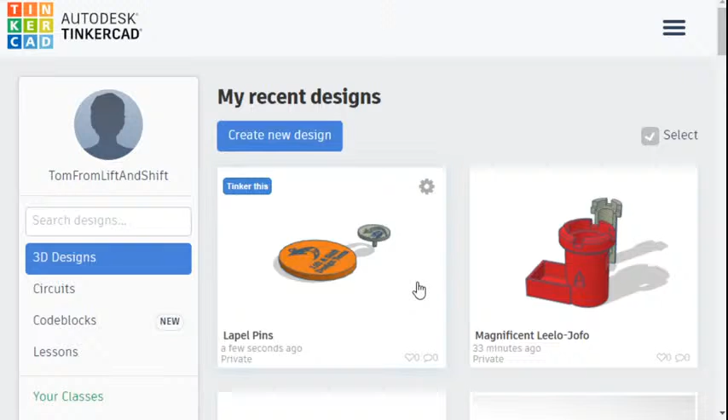We use this for a lot of design, both working with veterans in workshops and outside on our own, in our design team behind the scenes. Here we're building this robot - this was our first prototype of a brain for a robot we're designing. This is a keychain, and I'm going to right-click on that and make it go away somewhere else for the time being.

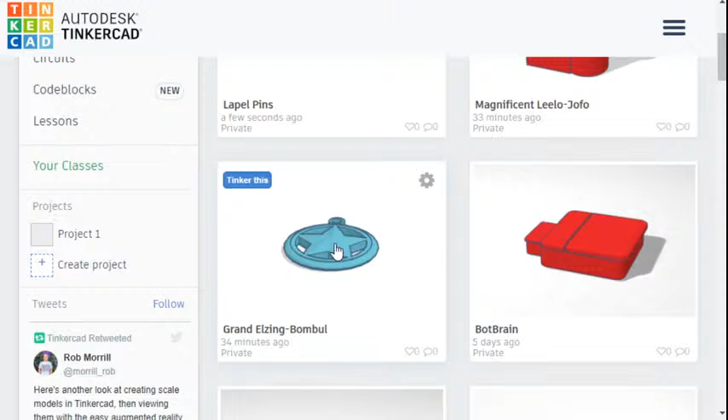This is a design by one of our design team members. It won one of our contests in 2020. It's a dice tower, and I have a feeling this may make it into some of these sessions as we turn it into a printable gift for people. It started out as that little tan object on the right, the little castle, and through one iteration developed into a much larger castle. We have some ideas on how to make it better, so that may be something we launch into on a Thursday night for one of these design sessions, and that should be fun.

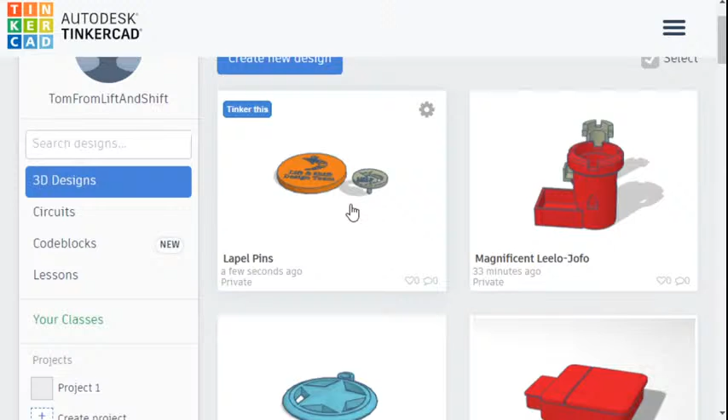Also in here we had a contest recently with some lapel pins, asking people to design their own. This was our design team who actually took to Tinkercad and came up with their ideas for their lapel pins.

Which I was absolutely amazingly thrilled with.

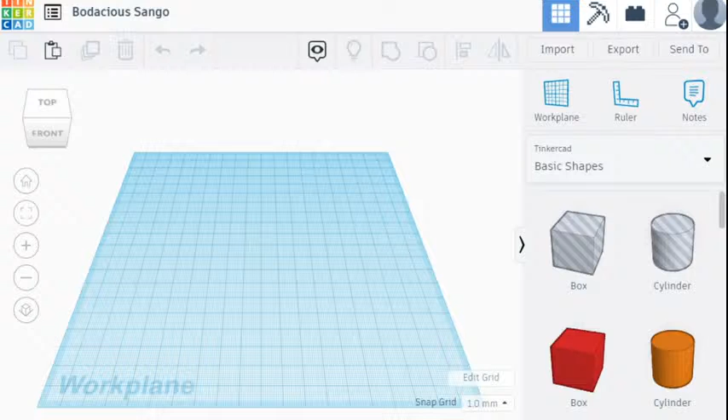Here we're going to start with a very simple design. I'm going to create a new design in Tinkercad, and here's my one tip of the night. I found recently that the toolbox slides back and forth, and I like it open, but it's too big the way it is. So I can shrink it down by going to my menu and zooming out in Tinkercad. Now my menu isn't as big and bulky, not taking up half my screen. For this session, I'm going to zoom out of my view so I can see my workspace, my toolbox, and actually do some things.

So we're going to design that keychain, the star-looking object you saw. We're basically going to design that keychain, and if anybody tonight wants to donate to the cause, we will print these keychains and ship them to you. But like I said, this is much more about giving things away while we're doing it.

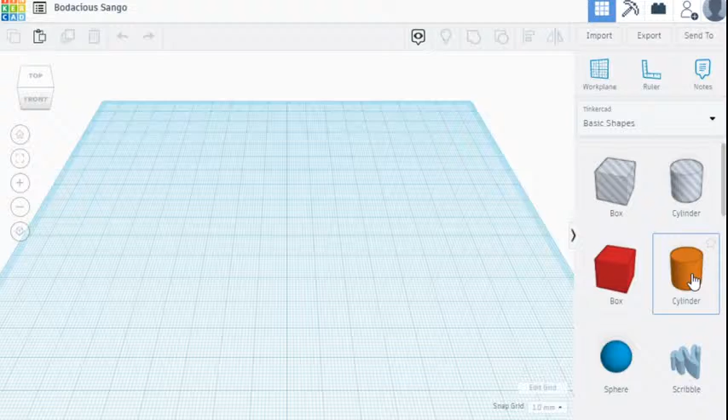I'm going to start with a cylinder and make it flat. I'll click up here and change it in the numbers by 3 millimeters. Here's the cool part: because I zoomed out on my window, I can zoom in very close. I'll center on my object so I can see it, and crank the sides up so it's all fancy and smooth. This is 20 millimeters by 20 millimeters.

I'm not a big fan of that, it feels kind of small. So I'm going to change this to 30, and change this to 30 as well. I'm kind of doing this freehand off the top of my head, and I promise we're going to end up with the same model. I'm going to slide it over again, actually I'll do that number right there.

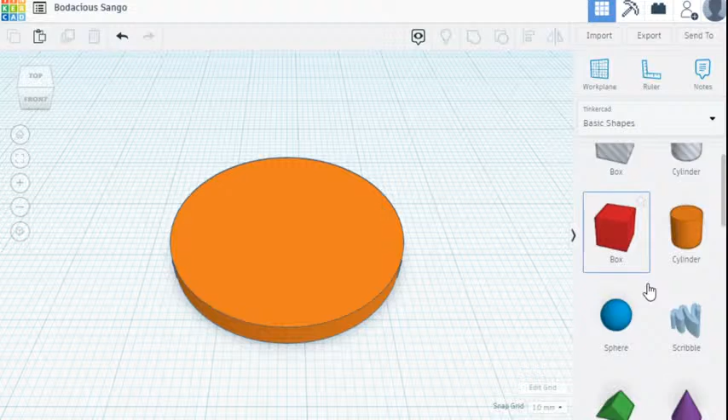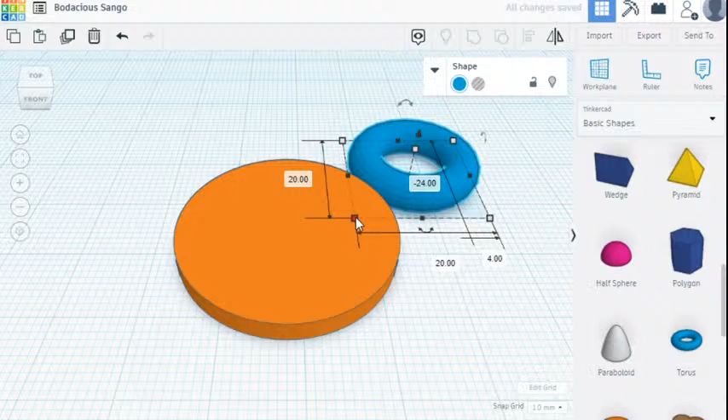Now, I don't like the sharp edges because it just doesn't feel right to me, it looks like a coin instead of something that hangs on your keychain. So let's talk about some design. We can get rid of the sharp edges by putting this donut around it. Yep, okay, it's not a donut, it's called a torus, that's the technical shape. The name for it is a torus, but I call it a donut because, like Homer Simpson, that's much of what I think about.

I'm going to get this out a little bigger, like that. And I'm going to drop this down to, let's say 2.75. Let's try 3.

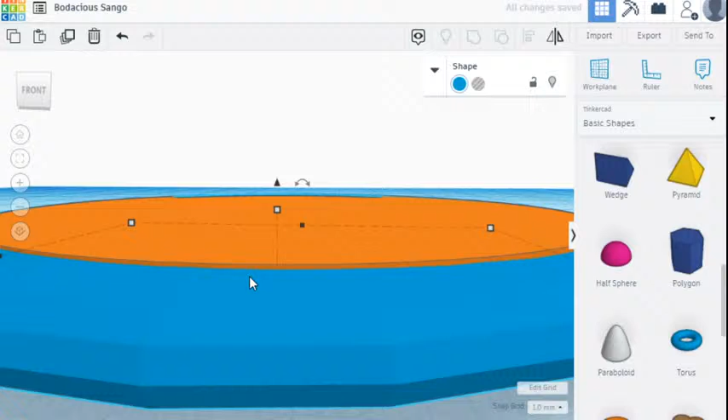I'm going to drop it in there. What I'm looking for is this lip right there—see that little edge? It's almost like a piece of molding that fits around this. So it gives us this round disc, this soft disc, but it gives us a flat surface.

So now we've got this pocket watch shape, and I'm going to call it a pocket watch as we get further along. I'm going to unfold my shape characteristics. I want to crank up the sides so it's a little smoother, and you can see that right there—it got a little smoother in the steps.

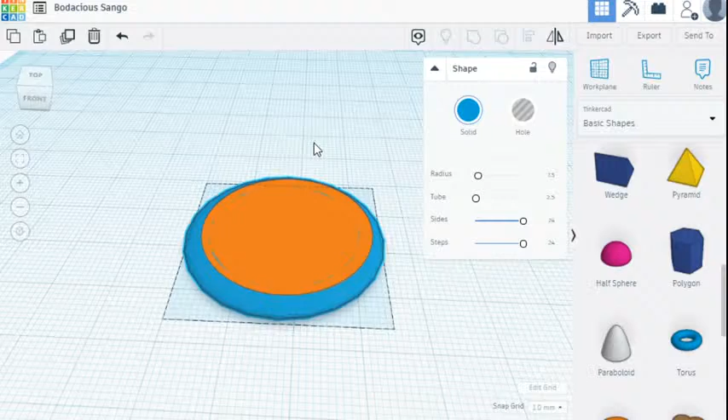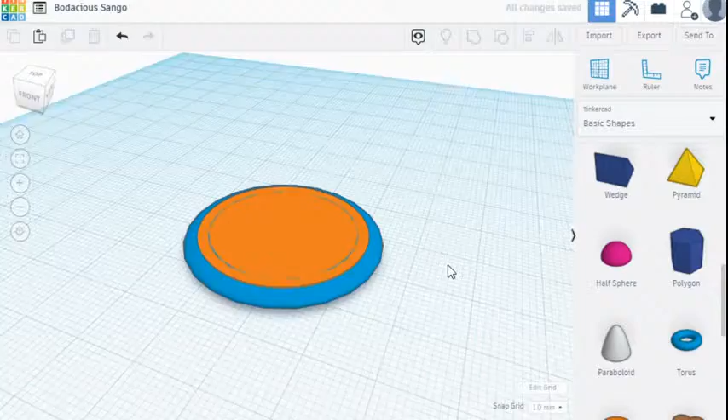I'm going to back up, because today I'm not all about design and telling you how to use these features up here, like aligning things and grouping things. I'm going to go through this a little bit faster. I'm going to grab all my objects, and instead of grouping them, I want to align them like that. So this is kind of like the speed course for more experienced people in Tinkercad.

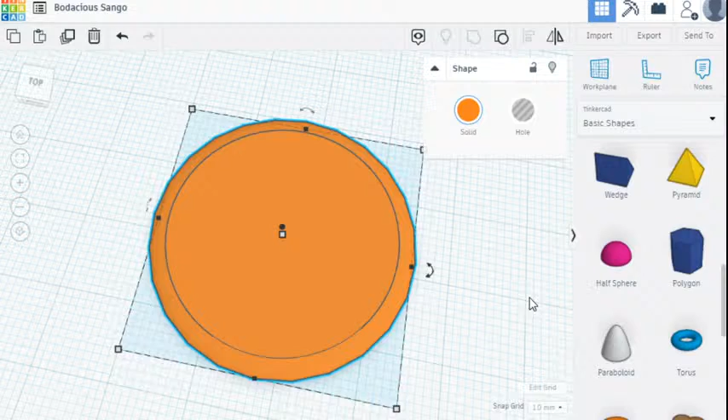So now I've got this disc, or this soft donut with a flat surface that I can work on, and my pocket watch is pretty complete. I could put it together and say I'm done, but I'm not happy with that yet. That still doesn't look like a very cool keychain. So I'm going to add this tube.

Now I'm going to focus on the tube. The tube is going to be the loop—we're going to make this a loop like that, add this, and combine all of these to make it a loop. And the tube as a basic shape doesn't really work out so well.

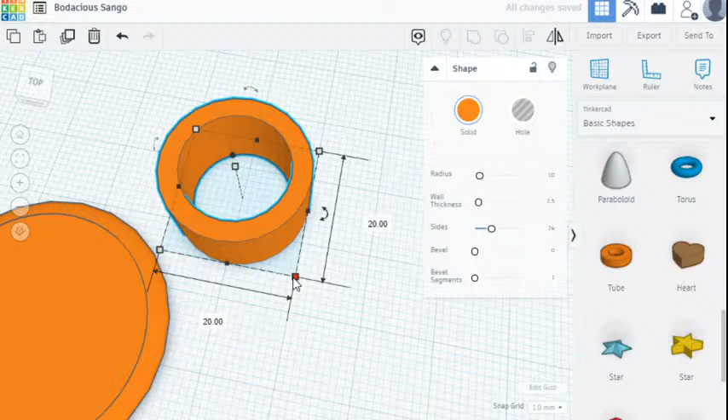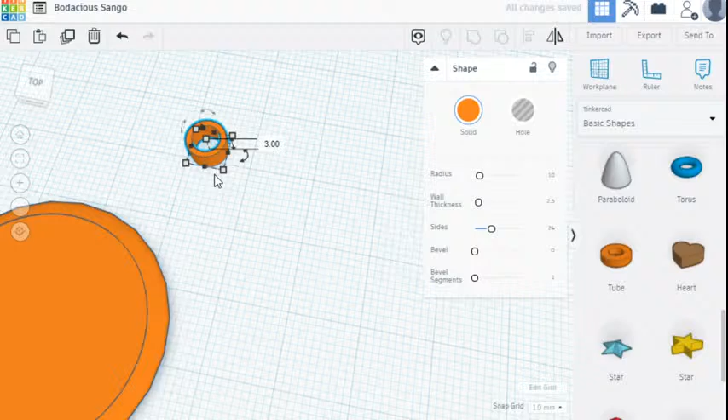So I'm going to change it, because I already know this ahead of time, to about 6 millimeters. I used a caliper and measured some of my key rings and came up with a good number of 6 millimeters for this tube. I'm going to shrink the tube height down to 3 millimeters, because everything I'm doing today is about 3 millimeters tall, and I'm going to add it just like that.

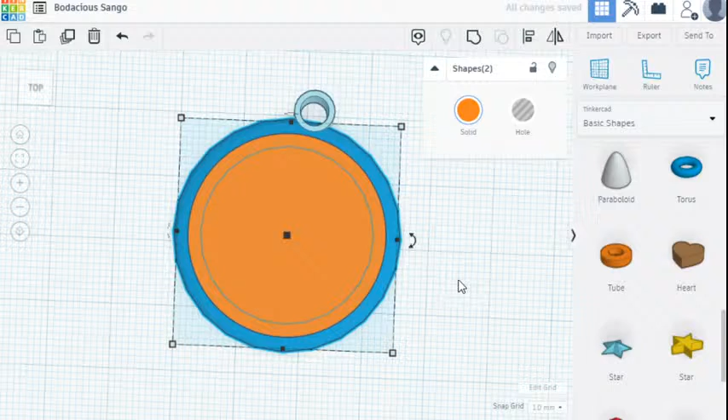Check it out—now all of a sudden it's starting to look like a keychain. I'm going to start coloring these different colors so we can tell when parts are joined. That's just something I like to do. I get confused when I go to look at parts and they don't look different colors—I forget that they're not the same object.

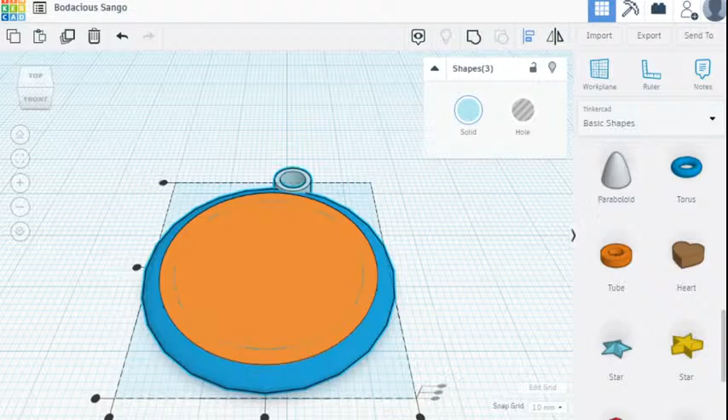So here it is, and now I can align myself back to a standard view and see that this isn't lined up at all. I'm not happy with that, so I'm going to align all of these in the center. There we go—I'm going to make sure there's some overlap right here on my keychain, so I'm going to actually go back and make this overlap first.

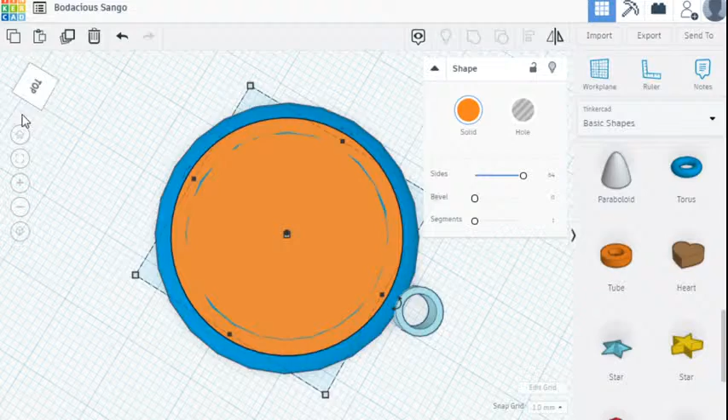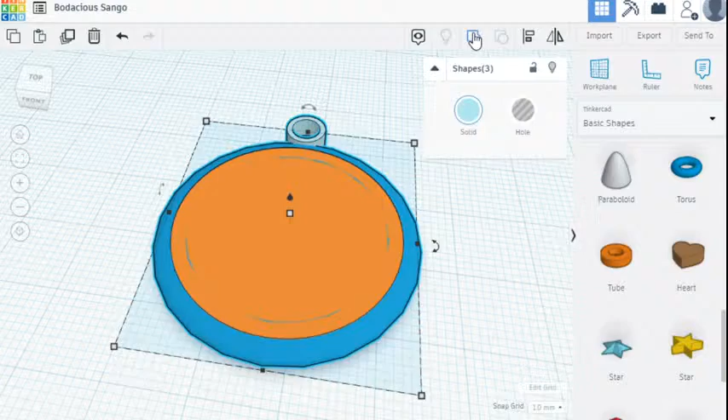Then I'm going to take this home view, zoom in so I can see everything, so I can get a good view of the alignment. Just like that—cool, so everything's lined up. That is my shape, that is my pocket watch type object. I could combine all this now and make it one object. And there we go, I've got this cool basic shape for a keychain.

Doesn't look like anything like that little star I showed earlier, and to be quite honest, it's extra boring. I'm very big on creativity and design, and I feel like this could have improvements. This is where things vary for us.

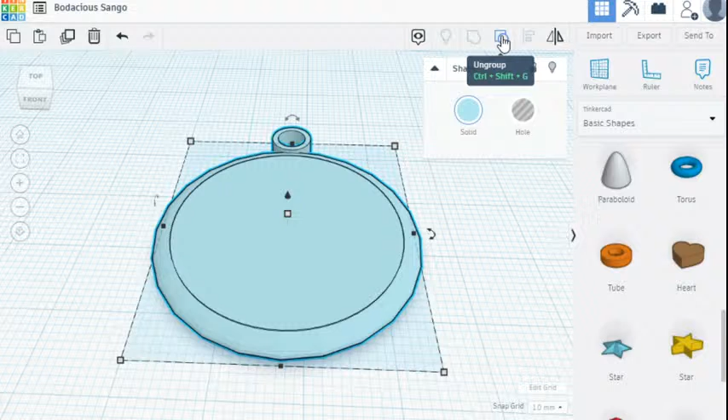I encourage veterans to personalize these if they come back for sessions and figure out how to use this platform. So what I'm going to do is take it apart now, and give some examples of how they can personalize it.

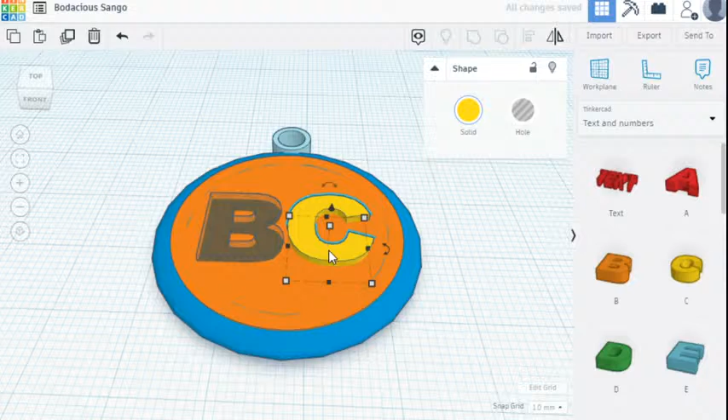Some of the examples I give them are to add their initials, which they can do by creating these holes, like that. I could add initials if my name were Bruticus Cuticus—I don't know, just spitballing here. That could be my keychain. I'm not cool with that, I'm going to undo those—that's not my name.

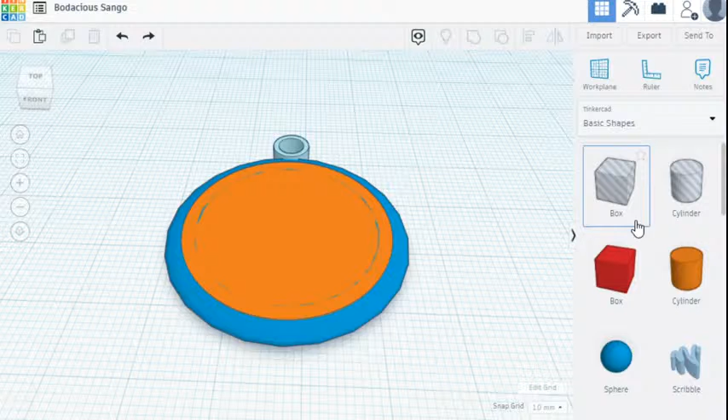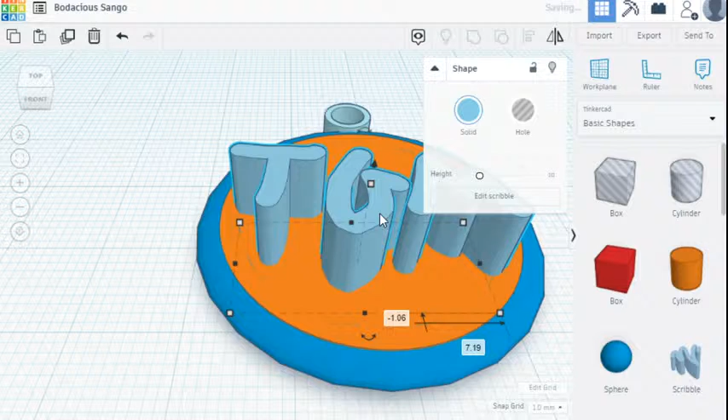I could go back to basic shapes. I can scribble, so I can scribble in my name—my name is actually Tom. So I can do that, and I can click on done, and there we go. There's my handwritten name ready to go. There's a lot of different things I can do here with this keychain.

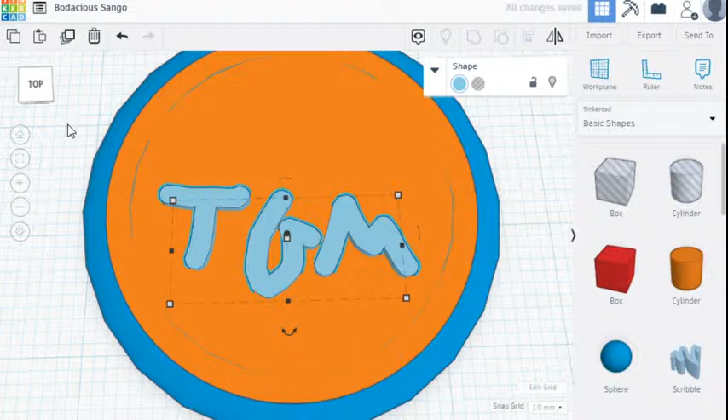I'm going to center it, drop my shape out of the way. This is where I would maybe not make it 10, maybe make it 4, so it's raised. And then I could center it on these objects like this way, so it's centered on the keychain.

But I draw chicken scratch, so we're going to back out of that too. Undo, undo, undo. I'm going to make this fun—I'm going to make this a hole.

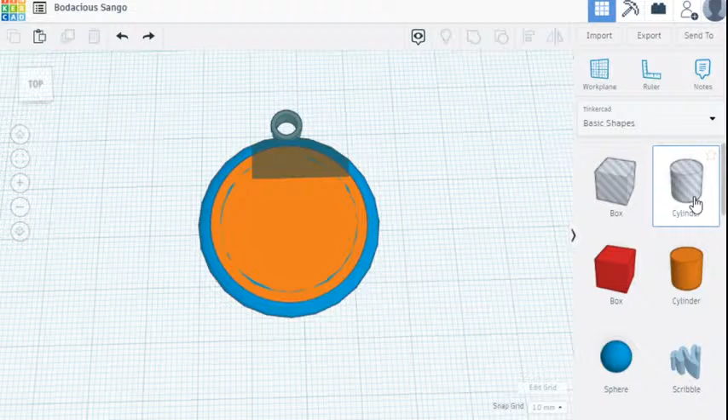So what we're going to do is drop this. Actually, I'm going to drop it over here because I don't want to get confused yet. I want to cut out the middle, but have a flat surface. So I'm going to use 27. This doesn't really matter, I'm just being arbitrary here. I've done 26, I've done 27 when I've done this design with veterans. The point is I want to make it smooth.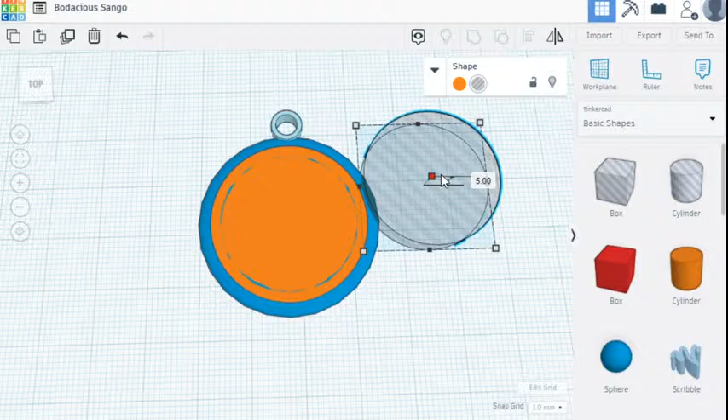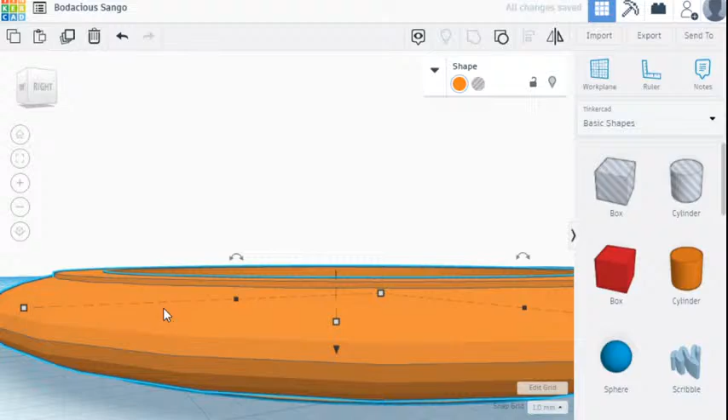I'm actually going to shrink it down. I'm going to do 26 this time because I like having this molding type feature. I'm going to push that up. This doesn't matter so much because I'm just going to cut a hole in the middle of my object. So I'm going to line this up just like that, and keep this ring separate for a while. I'm going to combine these like that. So now I've got this flat surface with this ridge and this ring and this emptiness in the middle that I can customize.

I'm going to keep my keychain loop off until I'm done. I'll add my keychain loop at the end so I can align things to center, left, right, all that other stuff. So it's there, but I'm ignoring it for a bit because I'm going to create that star that goes in the middle, and here's how we're going to do it.

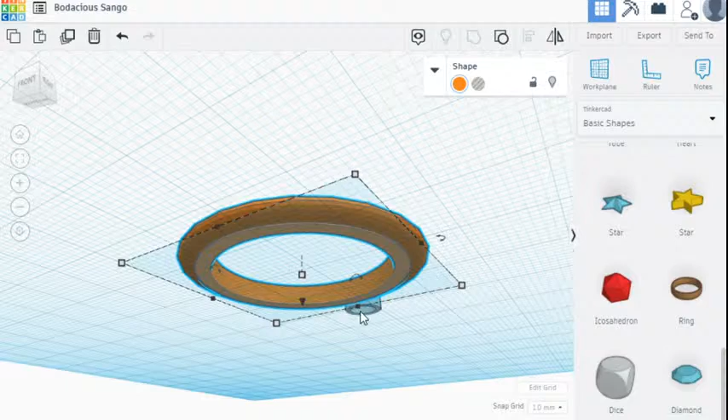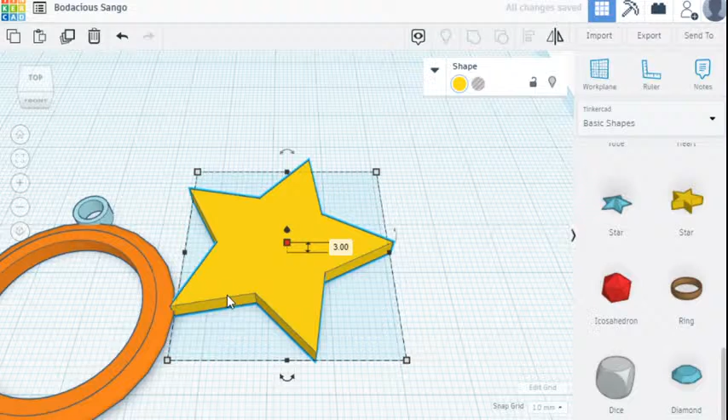Well, we have to fill in the space. This entire keychain will be flat on the bottom so that we can 3D print it. So I'm going to add the star here, and that's a bit big. Just like everything else I've done today, I'm going to drop this down to 3 millimeters. And I see that it needs to be rotated 90 degrees.

There's 1 point up here, 1 point here, 1 point here, 2 points on this side. So I need to rotate this 90 degrees like that so I can line it up better. Very cool, now it will match up and down, left and right. I'm going to take a guess here and go with 27 millimeters as a size, and try to drop it in the middle of my keychain like that.

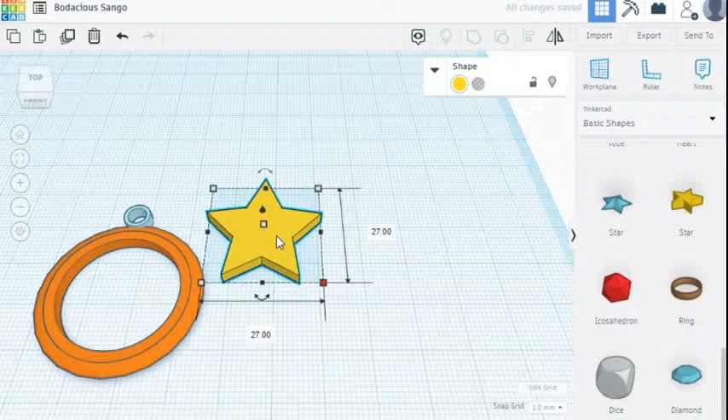Now here's the fun part. This isn't going to line up perfectly up and down, left and right, I don't think. I've done this in the past and had issues with it. Yes, and I'm going to show you exactly why.

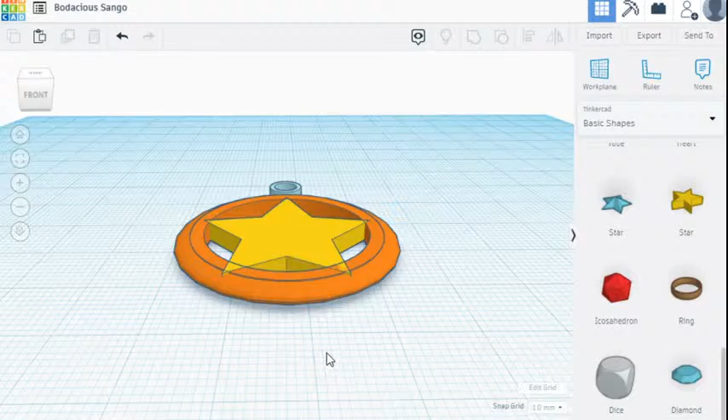So this is centered, and you can see if you look very close, let me scroll over, the tip of the star on these bottom points is showing outside my little fancy recessed molding type shape. On this end, it's because the way the star is laid out in 5 points, center is here, doesn't necessarily mean all the points have the same distance from the center as far as the X and Y axis is concerned. So I need to move this up just a tiny bit so it's not centered, and now it blends together.

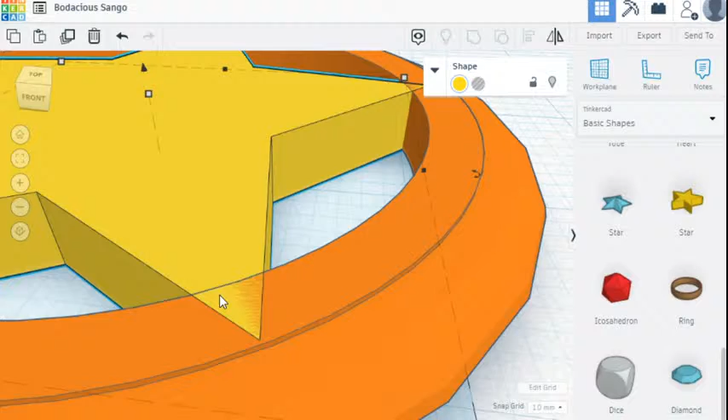But remember, I made this 3 millimeters, I made all these parts 3 millimeters. Now I have this star that's 3 millimeters too. So this star is now aligned enough that it won't have any jagged edges sticking out of my little ring. That's really what I want. That's the goal here, that's the key.

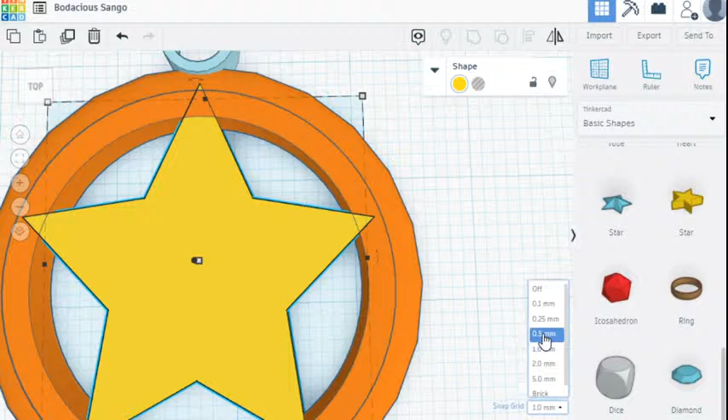I could probably move it up one more. Oh, nope, I can see it, it's starting to show up there. Right there. I can snap my grid down a little bit more so I can move this with a finer precision.

In fact, I may do that, but what I really want to do is, I'm still not done with this star. It's very boring to me, there's not enough texture to it. So I'm going to add some texture to the shape.

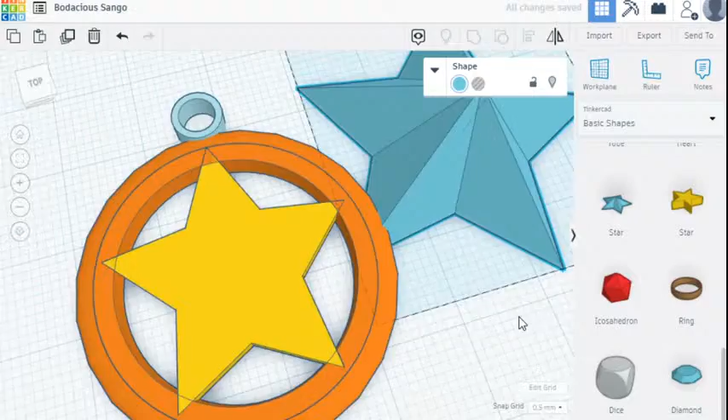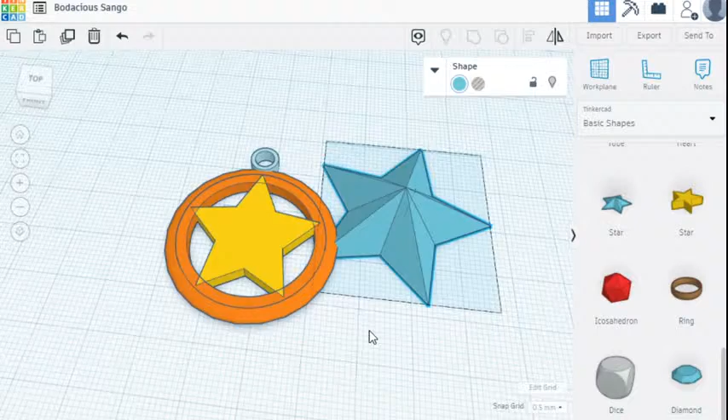Here we go, ready? This is the kind of pyramid star. It's got the same shape, it's just, I don't even know what to call that shape. It's a different textured star, that's all. So I'm going to rotate it 90 degrees, just like that, just like I rotated this one. I'm going to lift it up.

In fact, I'm going to lift it up 2.95 millimeters because I want it to join and group with this yellow star. I'm also going to shrink this down.

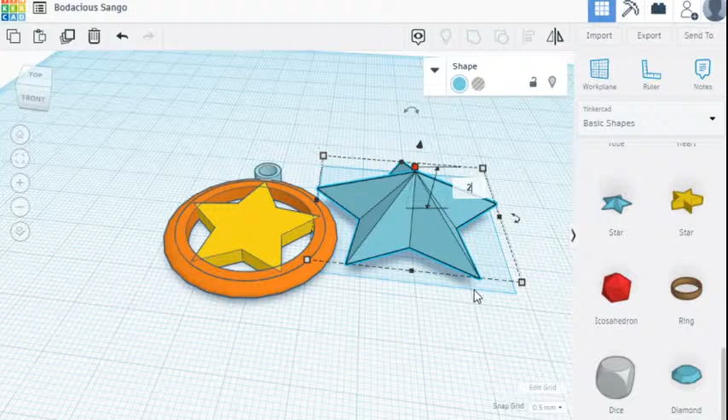It doesn't need to be 10 millimeters tall. It'll jab you in the pocket. It will make you uncomfortable and probably not very happy. So what I can do is make it 2 millimeters so that it just has this slight bevel to the star. It adds some texture without creating this jagged surface.

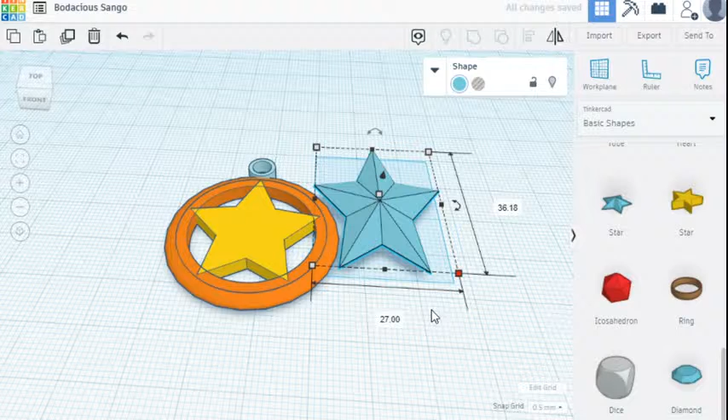Next step, just to match sizes, we're going to go with 27 millimeters all around. So check it out - if I put this right on top like that, you can now see I have this cool star with a little bit of texture.

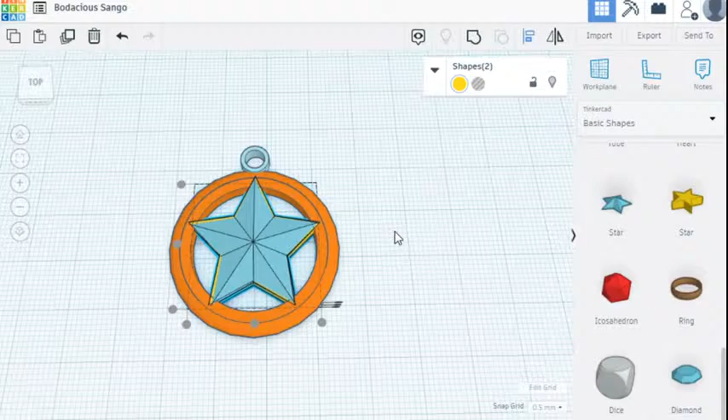But all these are not grouped together. They're not centered. I need to line them up. So what I'm going to do is grab both of those parts, quickly align them this way, but not that way. Very, very cool. Okay, now I'm going to join those so they're one part.

So now you can see on my 3D model, there's a star with a raised point in the middle, kind of like your Christmas tree star, maybe.

Now, because I aligned them, I may have moved them both to the center of something. I need to go back and do some alignment here. I'm going to align them that way. They're aligned left, right, or X, Y now, both in the center.

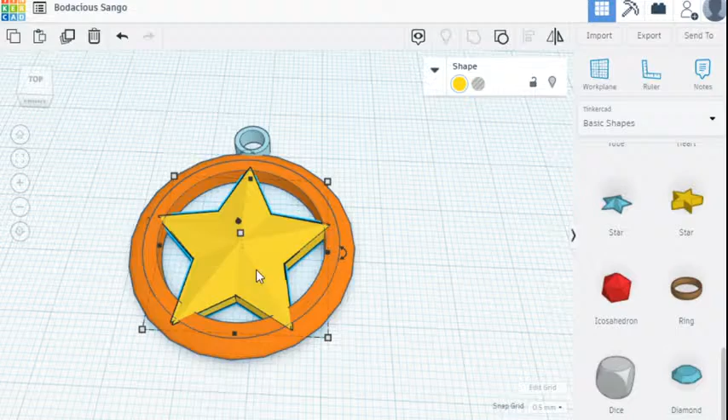But I will still have this little lip sticking out right here, so I'm going to slide this up a bit. Check that out. That looks centered around the ring to me. Cool.

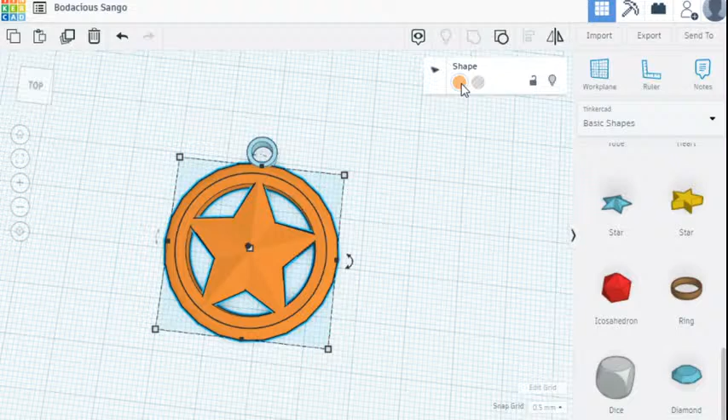Now I'm going to join these two shapes into my orange shape. Now I have this star. I could probably lift that up a little bit. Nope, that's not what I wanted to do. Just like that. What I want to do is get that very close to the top right there. Yeah, there we go, there we go. Cool.

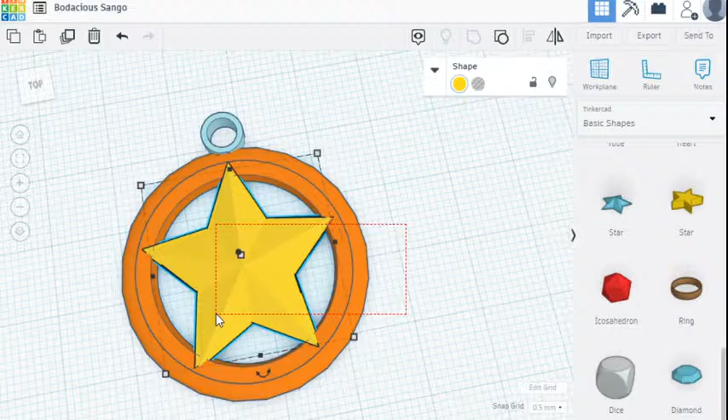Now I'm going to line it up. Now I'm going to group it. Very cool. So now I've got all these cool textures and crevices and points and things that aren't sharp. They can go in your pocket. They won't jab you. They won't monkey with your keys. They won't do crazy things.

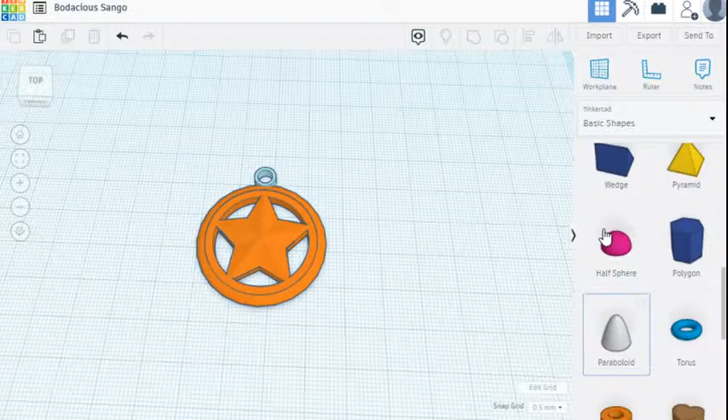And it's not as boring as, remember when we started, we had that cylinder. That was what we started with, was the cylinder. And this takes maybe an hour or so when I do this with veterans, when I open up workshops and say, hey, look, let's learn how to model things.

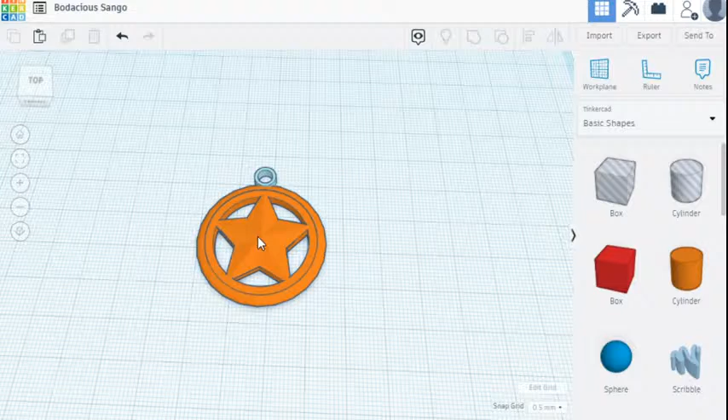But now I'm going to add my loop. And, oh, it is centered. So I can add my loop. And there we go. Now I have a keychain. And that is it right there. That's the completion of my model.

This is the standard keychain that I use to give out to veterans who attend, who want to learn how to do all these things like aligning, creating holes, grouping objects and joining different shapes and things. That was an abridged half-hour version of what I try to give veterans as an experience, and then the process goes on to I spend a day printing all of these keychains and sending them out to veterans and invite them to come back, where they can learn to do a little bit more.

They can customize their keychain with initials for their children, their wife, their mom, whoever is important to them. They have added little hearts and stars and dates when you join the military, or dates of somebody who did not come home with the rest of us. There's a lot of different things that I've seen in these workshops,

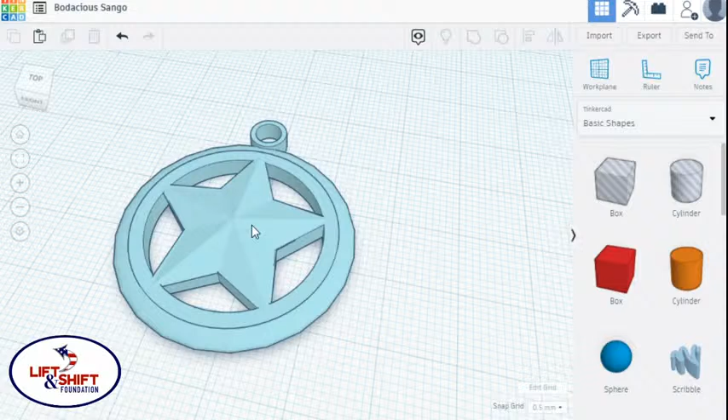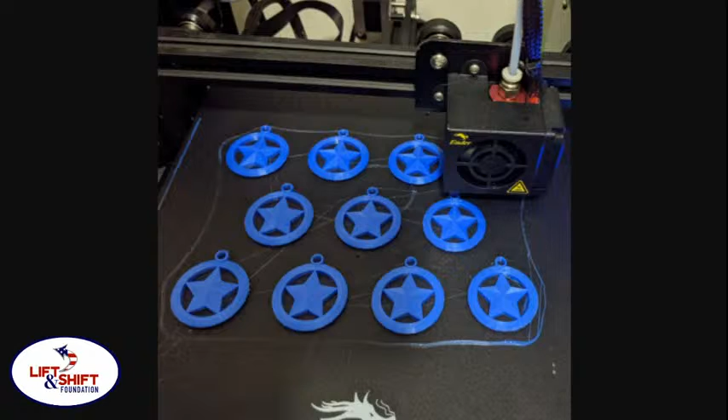standard keychain for some of our very introductory workshops. Here is the finished product from one of our last workshops. I printed all of these for a lot of other veterans, and this was one batch being printed. I think that was my initial batch. I had to adjust my bed and do some other things, but that was my first batch of 10 that came out. I ran through several batches.

That's about it, I think at this point I can close that. And yeah, I didn't expect too many people hanging around viewing over this time period, especially because there's just not a lot of people on or following us.